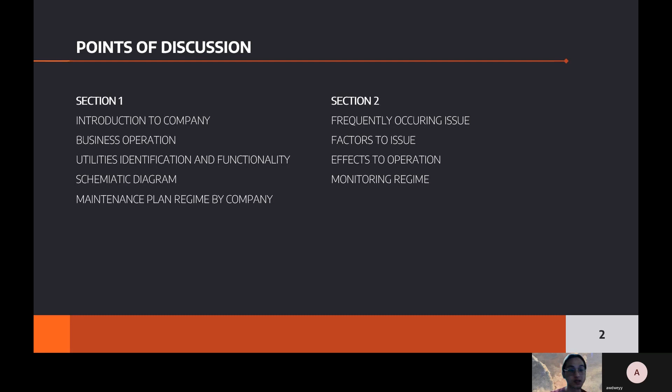Today on the presentation, I will present about the findings for mini project number 1 and number 2. So a few points are going to be discussed here. We have section 1, which is going to cover mini project number 1, and section 2, which is going to cover mini project number 2 that will be discussed further on. Before that, my name is Audrizak and I'm going to be the speaker for today.

Section 1 is going to cover mini project number 1, and points of discussion will be introduced during the discussion. One of the points would be the schematic diagram, which will be discussed together with utilities and identification.

For the introduction to the company that we have chosen, I have chosen UniKL MICET. It's situated in Alor Gajah, Melaka. The nature of the business is a university which focuses on higher education on many chemical fields. Thus it is equipped with many laboratories and workshops which emphasize training and hands-on experience. So the focus of the campus will be on the pilot plant.

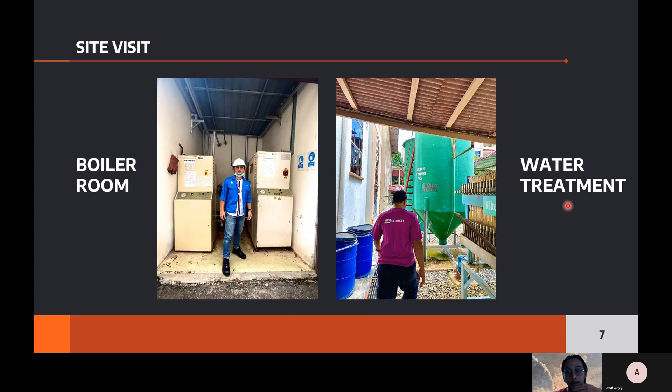So a couple of pictures at the site: this is me at the boiler room, and during water treatment Mr. Zamzuri explaining about the process.

Now for the business operation, I'm going to be discussing the organization structure. We only have 4 people here, so that's the size of the business operation. The hierarchy actually starts from the dean, but we exclude her because we're only going to focus on the pilot plant. So the organization is quite small, as I said.

The top of the organization starts with Dr. Mohammad Razali, who is the head of section for process. His prime role is to lead, manage, and develop his department. But for the pilot plant, he is responsible for approval of technical activities.

Then we have our lab manager, Dr. Amin Zafon. Main duties include overseeing daily operation, scheduling and task prioritizing. He will also cover for technical advisors, proposal of improvements, any upgrades and maintenance schedule.

Then we have our technical team, TS Mohammad Zamzuri and Mr. Mohammad Fairuz. Their responsibility in the pilot plant includes operating and troubleshooting experimental projects by students, and also performing general housekeeping to keep the equipment in good condition. But most importantly, they will be performing the hands-on maintenance and servicing.

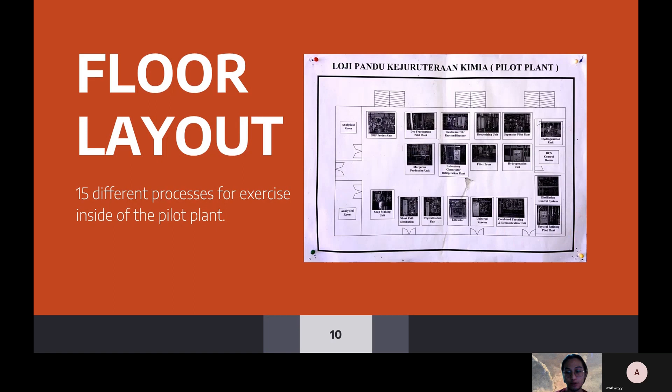Now for the utilities identification and schematic diagram. For the steam boiler, the first utility is the steam boiler. The main objective is to produce steam by heating water beyond the boiling point. The equipment will be used to supply steam to a few sections of the pilot plant, including dry fractionation and physical refining.

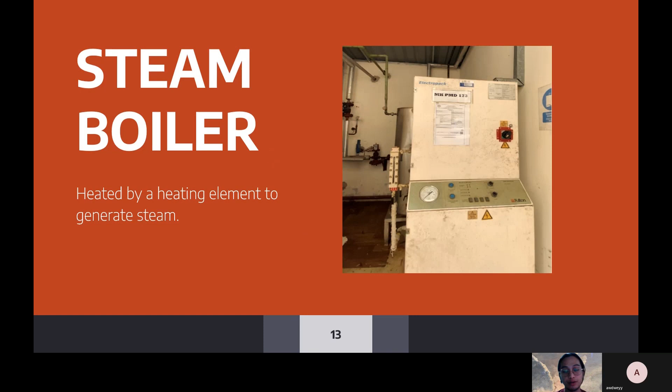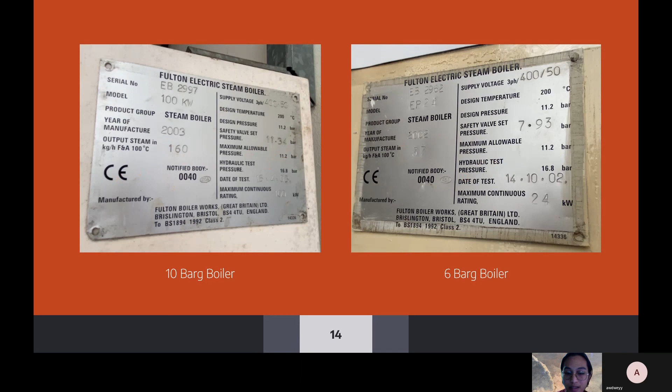Here are the equipment plates for the boiler. We have a 10-bar boiler and also a 6-bar boiler. The difference between both is the amount of steam that is going to be produced, so usually we specify it as 10 bar and 6 bar. The output for the 10 bar is 160 kilograms per hour, and the 6 bar is around 37 kilograms per hour. So this is one of the produced schematic diagrams.

The top section over here is a softener, which treats the water feed. It removes the sediment and contaminants, and also corrects the pH balance for the water. After the softening process, it's fed into the boiler room, one into the 10 bar and the other into the 6 bar.

The 6 bar has a built-in reservoir for both water holding and heating. But for the 10 bar, as we can see over here, we have an external reservoir for holding the water, and another reservoir inside is for the heating.

So any lines from the overflow, the condense, the drain, go back into the water tank. And also we can see that there is going to be a discharge, a separate discharge line. The 6 bar goes into a hot room, which is also a storage room for the semi-solid oils. And the 10 bar goes into the refinery and any other processes that need 10 bar.

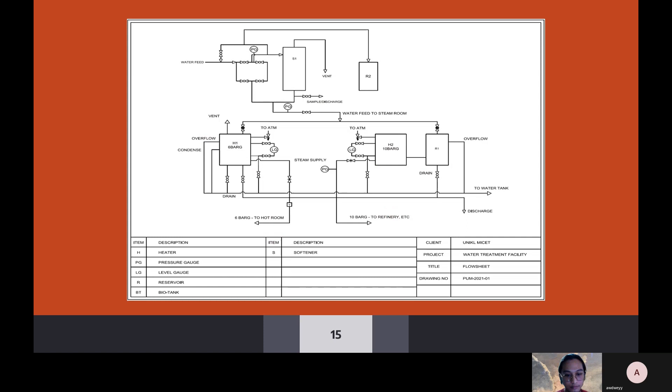Now for the water treatment, the second utility. The main function for the water treatment is to treat any water before being discharged to drains or being used for other activities. Here we can see the chemical treatment tank.

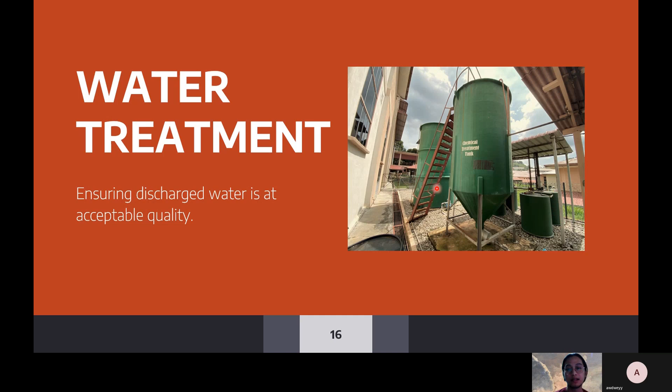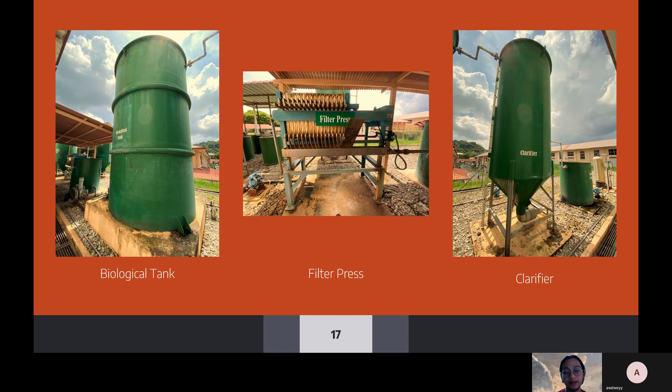And a few other pictures that were taken for the water treatment. We have the biological tank, and then the filter press and also the clarifier. You can see there's going to be a holding tank, also a multimedia filter at the end. Now for the schematic diagram.

Then over here we have the filter press. It's fairly straightforward, only to separate the solid from the water, and then it goes directly into holding tank number 1. From the holding tank, it's pumped into the biological tank.

This treatment relies on using bacteria or other microorganisms to break down organic waste. The pH of the water in the biological tank is already at an acceptable level, but we have to further treat the water, so it's transferred via overflow into the clarifier.

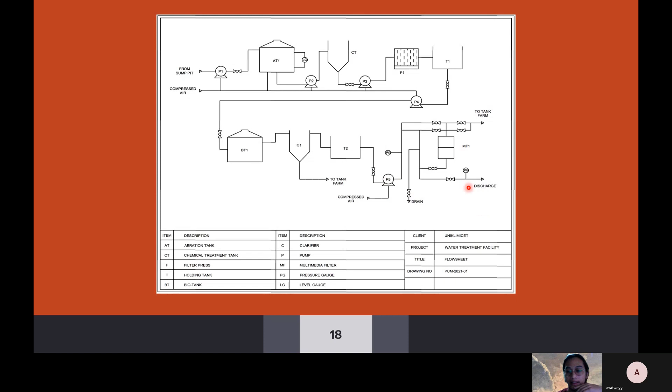Also from the clarifier, it goes to another holding tank via overflow, and from holding tank T2, it's pumped into the multimedia filter. As the name implies, it will filter out any remaining contaminants that are removable by filter, and then the water is discharged or used for other purposes.

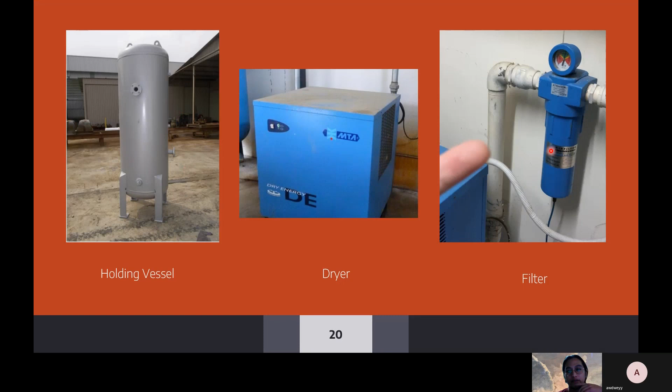For this part, it's quite simple, only consists of a few equipments. The function of this utility is to produce compressed air at around 8 bar. We can see here it's an easy setup. The main equipment, as shown previously, was the compressor, and then we have a holding vessel, a dryer, and also filters. So that means basically only 4 equipments, but we have 2 filters.

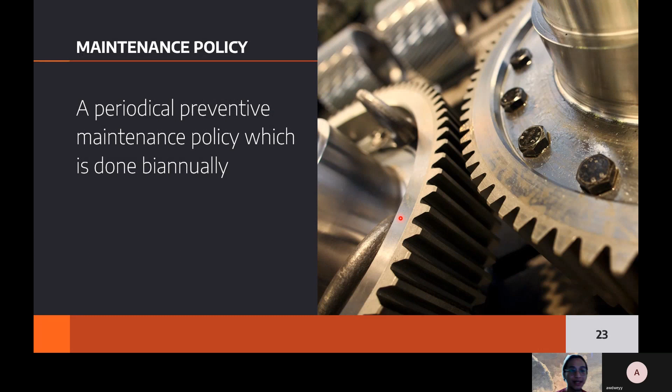Now for the maintenance plan regime by the company. The maintenance policy for the company is based off the maintenance plan, and I have a sample here taken from the maintenance program by the pilot plant. This is done for the steam boiler. As we can see, it's performed biannually every 6 months, and this was taken back in the year 2020.

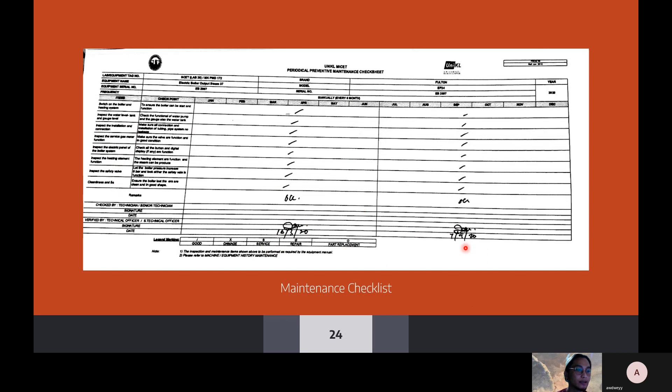A few items can be identified here, like switching on the boiler, inspecting the water level, inspecting the installation and connection, inspecting the service gas meter, checking the element, checking the electric panel, and some cleanliness steps, which is 5S. For the year 2020, around April and September, that's a gap of 6 months, biannually.

And then this here is one of the failures found by using the maintenance policy. They found the heating element damaged around April of this year, 2021. This will be discussed in the next section.

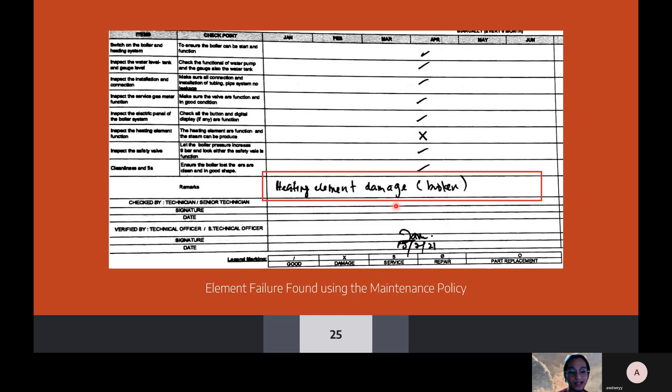Okay, now for section number 2, the basic findings are already discussed in the previous section. So this section is going to focus on the issues, the factors contributing to the issues, and the effects to the operation, and also a monitoring regime.

The frequently occurring issue was heating element failure. It's the most prominent issue that often occurs in the pilot plant. It's also called burnout of the element, and this is it.

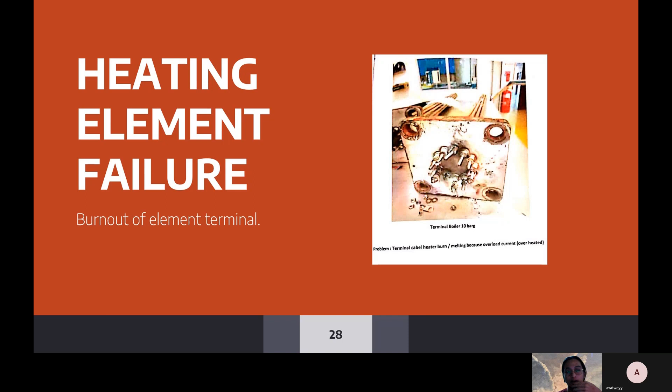The factors depend on the equipment age, the environment, and also the usage. The extent of damage depends on what operation and how the operation was run. As shown earlier, reported from the preventive maintenance plan for 2021, during the routine biannual inspection, the element was inspected to be damaged.

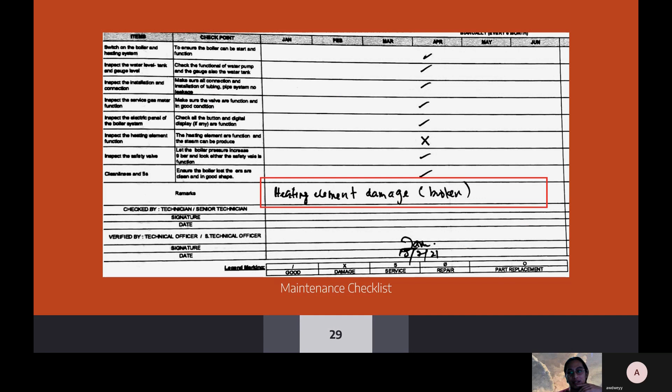As we can see in the terminal, for the 10 bar element it's melted, and also for the 6 bar, the wires have melted.

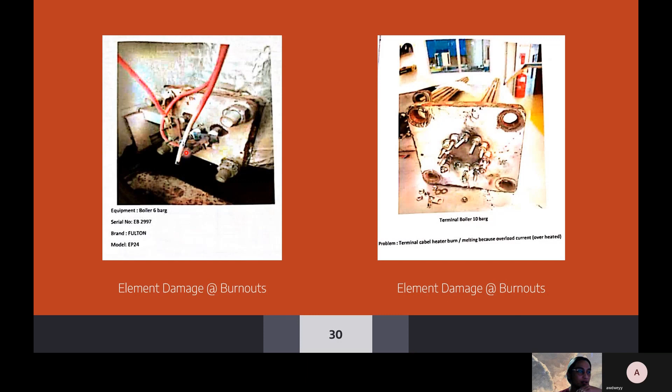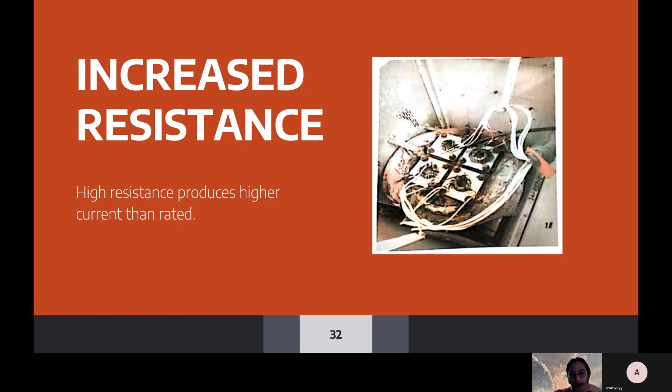And then what are the factors that may cause the issue? So one is increased resistance, by technical, right? We have to understand that high resistance produces higher current, and high current means it's going to produce a higher temperature. So yeah, for the issue, we have to understand that we are dealing with an equipment that produces heat.

So that one thing should be considered. All heating elements have their own operation rating, right? So when the protective material on the heating element is operated at prolonged time, oxidation may occur, which will reduce oxidation resistance. Hence it will induce more oxidation, or as we call it, scaling on the external surface of the element. So when oxidation occurs, the resistance inside the element also increases.

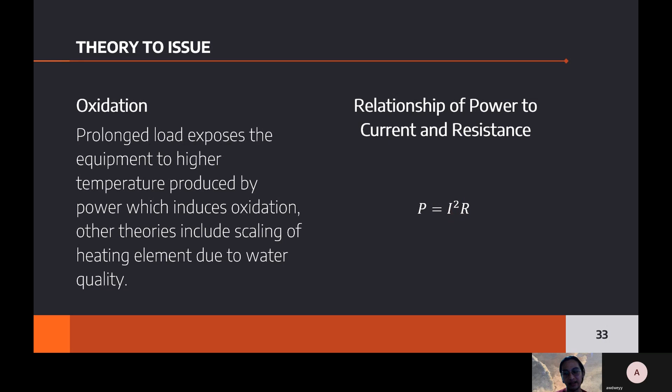Hence we can see over here the relationship of power to the current and resistance. Power is the product of current squared and resistance. So if we rearrange the equation and make the current the subject while we maintain the power, that means higher resistance basically increases the current, and then higher current increases the temperature.

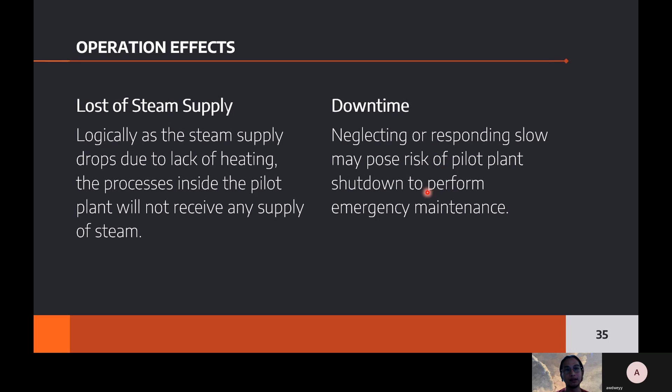So what are the effects on the operation? Two of the effects, logically, if the steam supply drops due to lack of heating, the processes inside the pilot plant will not receive any supply of steam. This will result in the students not being able to do any activities or experimental activities. And also for the downtime, if we neglect the issue and respond slowly to element failure, it may pose risk of pilot plant shutdown, because this is a corrective policy. We don't want to do any unwanted emergency maintenance or shutdowns.

So one of the main processes that are going to be affected is the bleaching and deodorizing unit. First of all, the deodorizing unit's principle is to remove contamination from oil and also recover the oil from the filter with steam. So if we have failure of the steam supply, this translates to failure of oil recovery, and it also lowers the quality of the product that will be produced, because the free fatty acid is not fully reduced during deodorization.

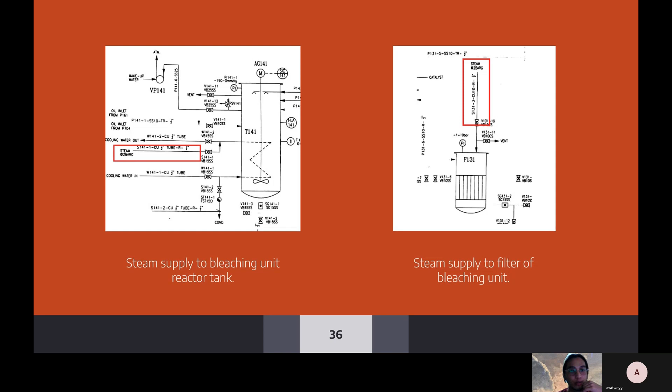And lastly, if there is no steam, then the product, which is our BDPO, is not going to be deodorized. Hence we are going to have a low quality product, or basically we failed an experiment for the students.

Okay, now for the monitoring regime, we have to understand about the frequency of the failure for the pilot plant. We identified the frequency from previous records that it occurs during a couple months around February and August of the years, and this occurred during peak study months where students utilize the pilot plant for experiments and exercises.

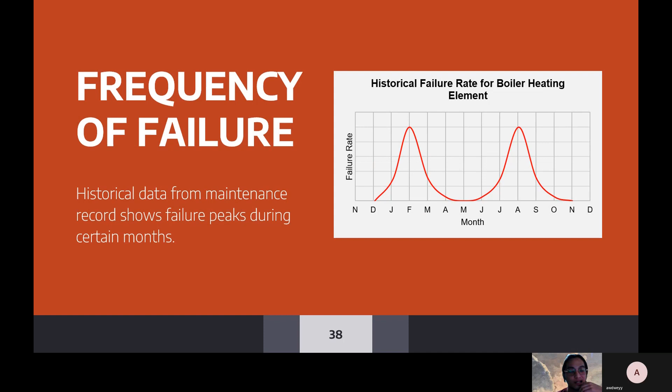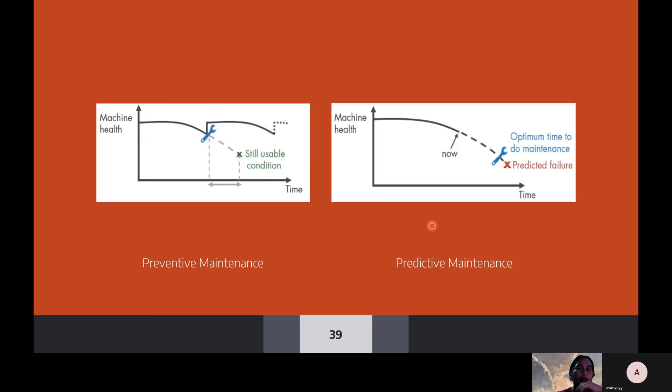One factor that has to be considered is the cost of deploying this type of policy. One study reported that predictive maintenance is the highest usage of capital when compared to corrective and preventive. So here we have a few things to consider for the regime.

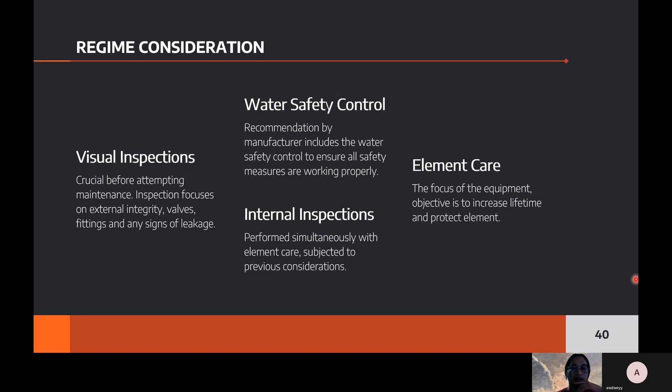All right, so this is the monitoring regime that I've considered. First one is visual inspection. We have to check for any leakage around the piping of the steam and water feed valves and also fitting. Before any repairs, we have to fully shut down the equipment and rectify the issue before operating the equipment, and the frequency is weekly.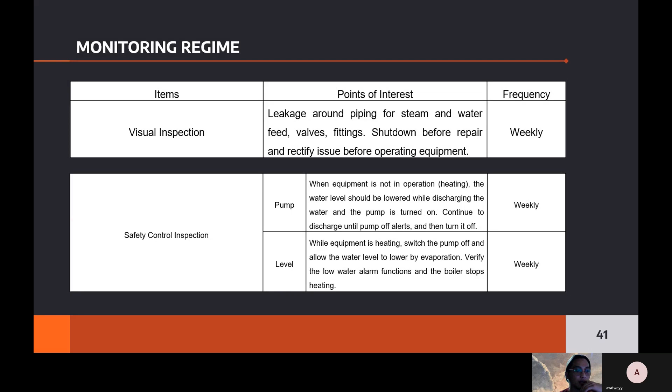For the safety control inspection, we also have to check the pump, the level, and also for the evaporation, it's based on level inspection. So this is performed weekly.

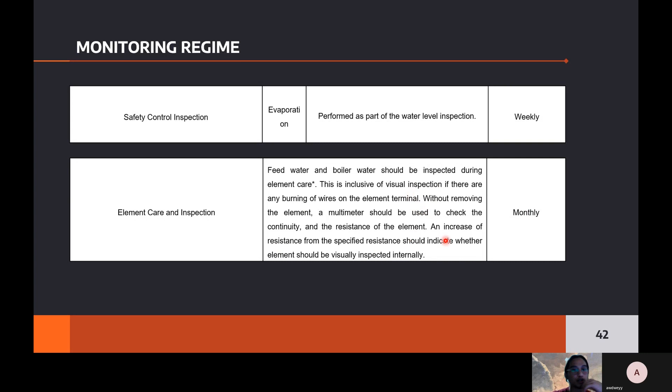And then element care and inspection, this should be done monthly. This is inclusive of the visual inspection. If we see any burning on the wires or any damage on the element terminal, then we have to do internal inspection. And then a multimeter should also be used to check the resistance of the element.

And lastly is internal inspection. So internal inspection is subjected to different conditions, like from the previous consideration. If the element is removed, internal inspection should be performed. But if there is no removal, a monthly basis inspection should be considered, depending on the usage of the equipment. And lastly, if the visual inspection is satisfactory, if all the safety checks are satisfactory, then a 3-month basis could be considered.

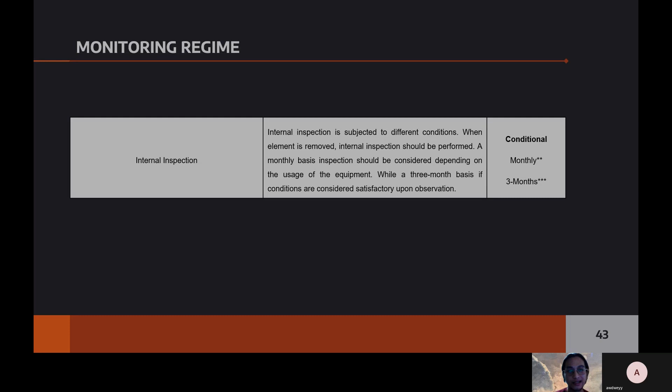So that's about it for the presentation. Thank you.